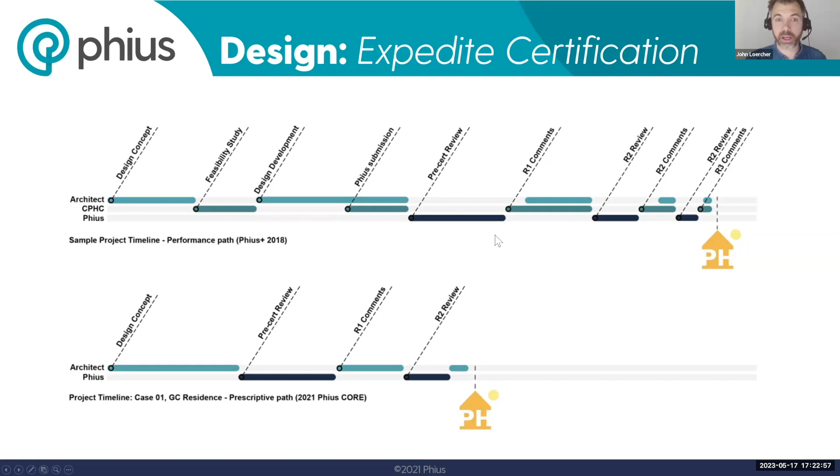And the idea behind this is that, again, we know how to do single family projects. We have a lot of certified builders that are coming into the market, a lot of design build firms coming into the market, and we want to allow for these builders, potentially these raters and verifiers, to submit for pre-certification as well, right? Like I said earlier, previously this was impossible because they didn't have that WUFI training, right?

So for performance path projects, it requires a CPHC to be the design professional to submit to Phius, but the prescriptive path will allow for all Phius professionals to submit for design certification. When we move into the construction phase, it's identical to the performance path. We still do need that Phius certified rater in order to provide all of the on-site QA, QC.

And essentially, they're going through all the prerequisite programs in an identical fashion to the way they did in the performance path. So from the rater's side, there's really no significant changes for the prescriptive path. Obviously, the rater should know that this is a prescriptive path project, as some of the requirements, performance metrics, etc., might be different than what they're used to on the performance path. But all of the prerequisite programs, Zero Energy Ready Homes, EPA Indoor airPLUS, EPA WaterSense, they're all to be adhered to, and we need to go through those programs in the same way.

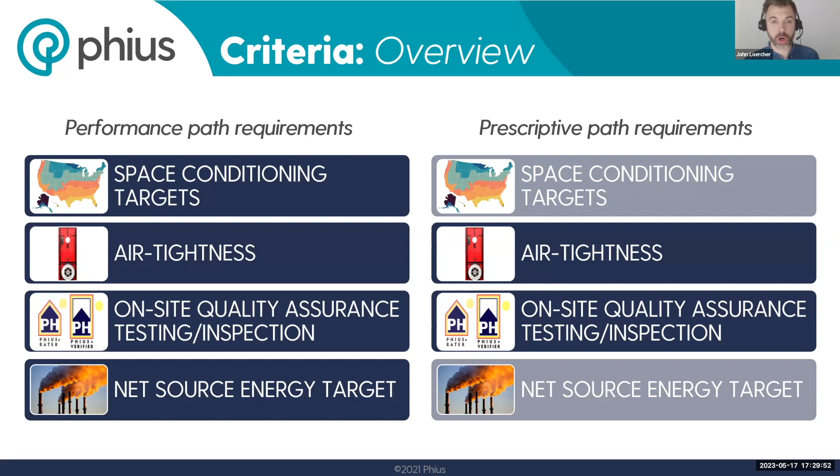So based on the information within the checklist, we're using space conditioning targets to generate the thermal resistance values. So you're still getting yourself a Phius envelope, and you're still hitting similar space conditioning targets, but the way that we're complying with those targets is making sure that we're hitting all of the thermal resistance values and other performance metrics in the checklist. But essentially air tightness and that QA, QC are going to be identical for the projects, two really strong requirements that we have for the prescriptive path.

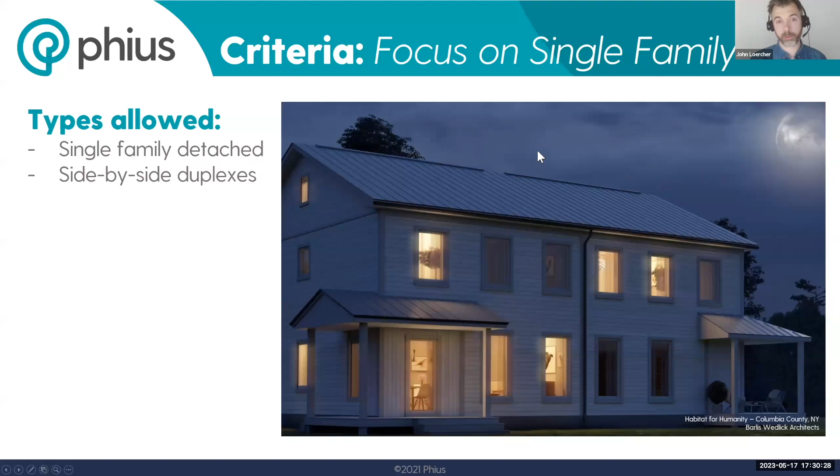Okay, excuse me, guys. So within this criteria as well, we do have some limitations. I had said this earlier, that we're really focusing on single family detached, but we are allowing for side-by-side duplexes as well right now. So these are the two typologies that are allowed in the prescriptive path currently. We do have some other limitations.

Form factor, or the compactness of the building, is something that will be a limitation as well as you're designing for the prescriptive path. And it's going to be one of the first things that you're going to want to check. Essentially, we'll put in the ICFA of our building into the checklist, and we will get a maximum area of enclosure surface, right? So based on the ICFA of the building, it's going to give us our envelope area and a max envelope area. So we need to stay within that.

That's going to help make sure that we're keeping our buildings more dense, smaller, and trying to avoid those kind of McMansion typology. But it also is a barrier for our energy modeling metrics, right? So our energy balance we know will stay and kind of work the way it's supposed to within a certain form factor. So we're trying to make sure that we're staying within that form factor.

Similarly, there's an occupant density of less than 900 square foot per person. Again, trying to keep that form factor kind of limited within this certain typology. And then no fossil fuel combustion equipment. So that's where we're very similar to Phius Zero certification. No jetted tubs or indoor pools because of the additional moisture load on the inside of the building, and then no natural draft fireplaces. So these are all the limitations for the prescriptive path. All right.

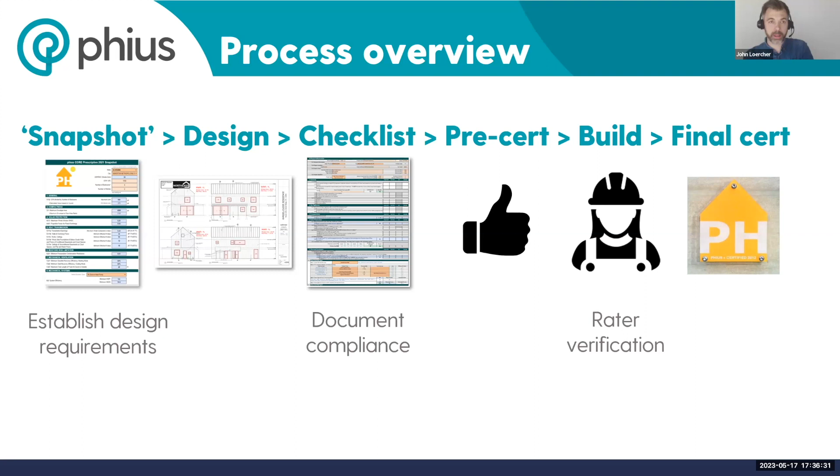Ideally, you get pre-certified before you start build, but we all know that story. Essentially, at a certain point, there's a handoff when you get from pre-cert over to the Phius rater, to make sure that they're in line with the construction schedule and they know when they need to show up to start verifying things on site. So like I said earlier, that whole rater verification section is going to be identical to the performance path. Okay.

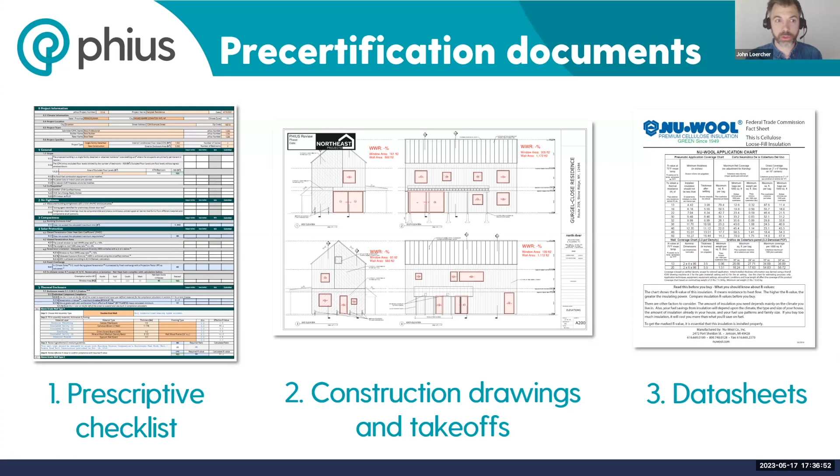So I had mentioned this already: the checklist itself, the construction drawings and takeoffs, and then the data sheets. I think this would actually be a good time. I'm going to take the new checklist onto the screen to show you the most updated version. This is where I'm going off script a little bit. This can be found at phius.org. I'll pull that on right here. So if you go to phius.org, we do have this section right here where you can download the checklist. And I'm showing you that because we update this often enough that it's worth checking before you start a new project, just to make sure that you have the most up-to-date version.

As soon as you open it, you're going to be prompted with a password, and it's going to say right in the prompt, type in Phius 2021. So it tells you the password right within that box there. You type that in. All that's doing is actually enabling the macros, right? So even though this is checklist based, it is still kind of a smart checklist. There's a lot of things that are attached here. So when you put in that password, that's actually enabling the checklist to work correctly for you.

What that also, thank you, Jen. What that also does is allow you to expand and contract the different individual sections, right? So as we're seeing it right now, everything's contracted, or minimized. But you can see there's sections 0 through 10 down here. Now, if you go all the way to the left, if you go to project information, for instance, you can start to maximize each of these individual sections, right? So we can go through each of these one at a time and really focus in on that individual section. You'll also notice that over to the right here, we have all of our feedback built right into the checklist. So you don't need a separate Excel where you're going to go back and forth the way that you did with the performance path.

Okay, so I'm just going to skip through a little bit of these. I do want to make plenty of time for Q&A at the end, but just to give you a little bit more of some of my experience working on projects with the performance path and prescriptive path.

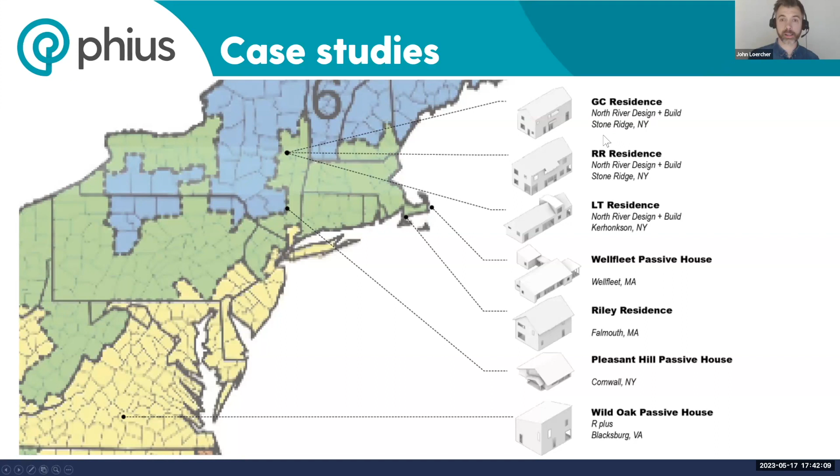These were the number of projects. There's 7 projects in total that I looked at in both WUFI and the prescriptive path, ranging from climate zone 6 to 4. So somewhat of a range, but admittedly not really getting into the cooling dominated climates here.

So these top 3, all with North River Design Build, are all design certified now. You can see the forms are somewhat limited, right? Very boxy geometries. The easiest way to hit the compactness is going to be this kind of 2-story shoebox form. We did start to play with that geometry a little bit, elongating it for this LT residence, but that really just came right up against the compactness requirements.

Project number 4 down here, Wellfleet, we had a lot of inside and outside corners. We had a lofted living area, so we were not able to hit the compactness requirement with that. So you can see, as we start to open up from that shoebox typology, it makes it a little bit more challenging. A large part of that was the lofted ceiling.

Riley residence here, very shoeboxy, easy geometry. We actually ran into a problem with the enclosure itself, which we'll take a look at in a few slides. Similar compactness problem with this project in Cornwall, New York, because of the lofted ceilings. This is just a single-story building.

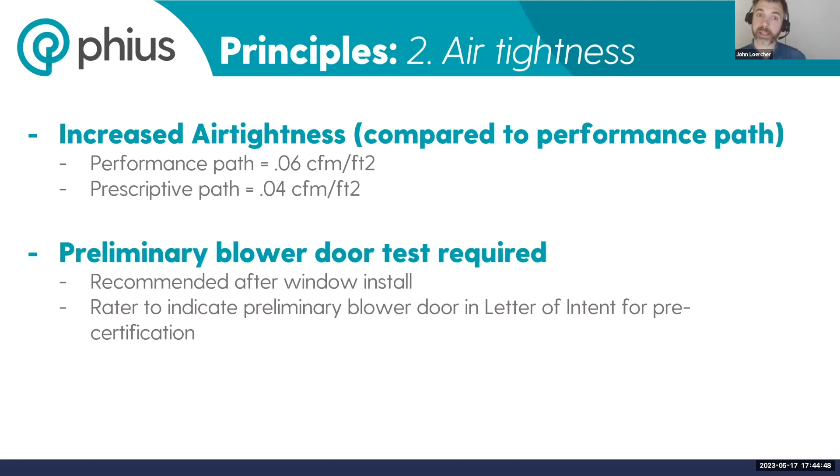Sorry guys, I'm just going to skip around a little bit here to give some high level points. Another learning experience was solar protection. This is going to vary based on the individual climate zone that you're designing for. So no matter what climate zone you're in, there is going to be something relative to solar protection. And it might even be that you need to have the proper surface area of window in order to get solar heat gain into your building.

So climate zones 5 through 7 are all dealing with only your net gain score. Essentially, you need a minimum amount of surface area of glazing. When you get into climate zones 0 through 3, these are your lowest climate zones. You're going to be dealing with a max solar heat gain coefficient, but also a fixed overhang requirement. So these are the climates where you're trying to reduce the amount of solar heat gain in your project.

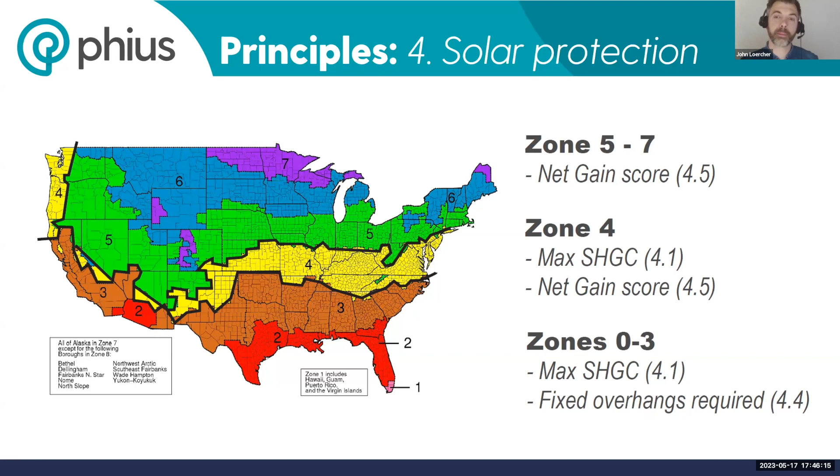And then, of course, you get that sweet spot in climate zone 4 where you have a max solar heat gain coefficient, but then also a net gain score. So you have a little bit of heating dominated and a little bit of cooling dominated strategies within climate zone 4. Skip that as well.

Another note on thermal bridging: within section 5, which is on the thermal enclosure, this really forced us to define what a thermal bridge is and how we are including that or not within the building review. So within the prescriptive path, we've defined continuous insulation as insulation that is uncompressed and continuous across all structural members without thermal bridges other than fasteners and service openings.

And we've also identified a minimum of R10. So as long as you have a continuous R10 around structural members, we will say that you're thermal bridge free within the prescriptive path, right?

And the whole idea here is that we need to be thermal bridge free because there's no energy modeling within the prescriptive path. So ideally, as we continue on with this path, we're going to be disallowing THERM models along with it. We're just going to be assuming that all the details are designed as thermal bridge free. As of this moment, we're still making some exceptions as CPHCs are getting up to speed with that.

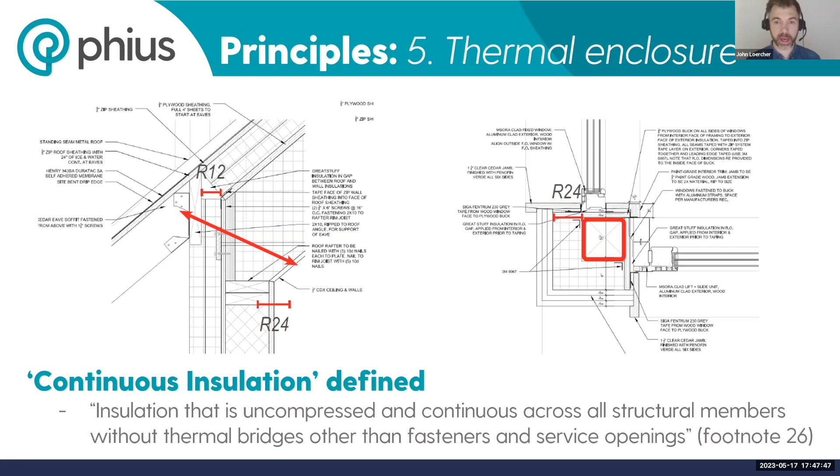Okay, so I should probably just end on these resources. I apologize, we're going through this really fast. The certification guidebook has been updated to include prescriptive path guidance as well. So you can always check out the certification guidebook as you're going through your first prescriptive path project.

I will also mention we do have this prescriptive path workshop. It's a 4-hour online workshop where we really get to start with a sample project and go through every single point within the prescriptive path, discuss and break down each individual input. This also goes into some of the program overview in a more in-depth way. A deep dive into the checklist, and then, like I said, we work through the prescriptive path with that sample project. So that is my last slide.

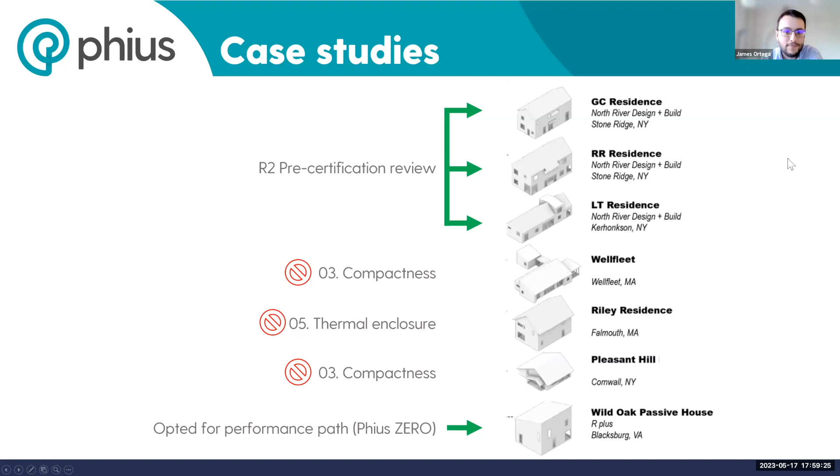John, this is Steve down in Charlotte. Hey, Steve. I literally, for the first time, have a house that may be simple enough to consider for a prescriptive path situation. Yep. And I'm on the brink of starting a WUFI model for it. But I just happened to remember this and saw this presentation coming up. So your timing's perfect.

Do you have any kind of an idea, fee-wise, what the difference is in your experience between doing the WUFI model as compared to going through this prescriptive checklist? So I can give the client some idea: if I do it this way, it's going to be X, and if I do it this way, it's going to be Y. And then I can explain the difference between the two paths and give them the data to make a decision. Yeah. I haven't done a prescriptive path as a consultant for a little while, to be quite honest, Steve, because honestly, it doesn't make much sense for me.

It's a fraction of the time. Really, it's a question of if the drawing set from the architect is good, doing a couple takeoff drawings. So what does that take? Maybe an hour or two for a project of this size, and then maybe 2 or 3 hours getting to know the checklist and putting in values. So you could have an entire checklist filled out, ready to submit to Phius within a day. Wow. And the builder is very experienced in ICF construction, so that's what they're going to be using on the house.